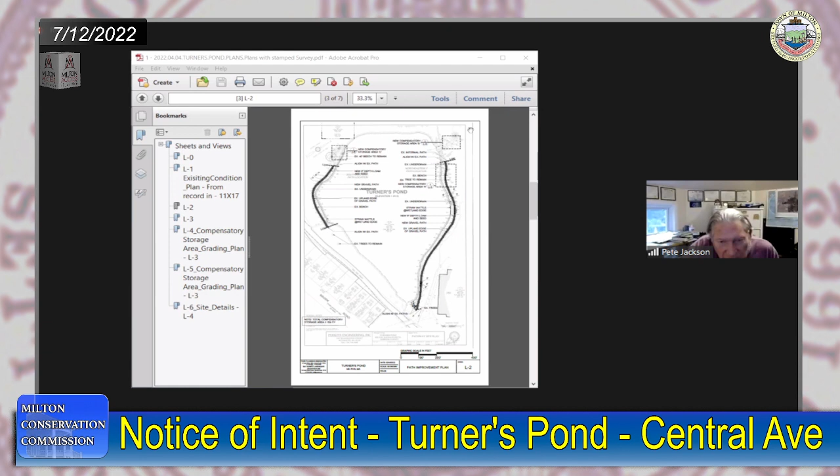Thank you, Steve, I guess you put that up. Yes, and those areas are along the north side of the pond. Up at the top would be Central Avenue and the Central Avenue parking lot. The lower right is the Glover School.

And the project on both sections will in essence raise the elevation of the path approximately 6 inches. It'll vary a little bit, and the calculation of everything is based on 6 inches, but because some areas have settled more and some less, it'll average 6 inches over the course of the pathway reconstruction. The north end, the longer end, is about 1,000 feet of path, and on the south side is smaller, starting right near the inlet that comes in from Pine Tree Brook.

Oh, now we're good, sorry. There we go, yeah, that's the path reconstruction. It starts on the other side, Steve, where the inlet from Pine Tree Brook comes in, and goes about 540 feet till just shy of the large beech tree that everybody likes along the pond there.

And none of it is in the BVW. There is some riverfront impact, and we've quantified that. There is filling with the new path material, which is very similar to what's down in the path now, combined with loaming and seeding the edges of the path.

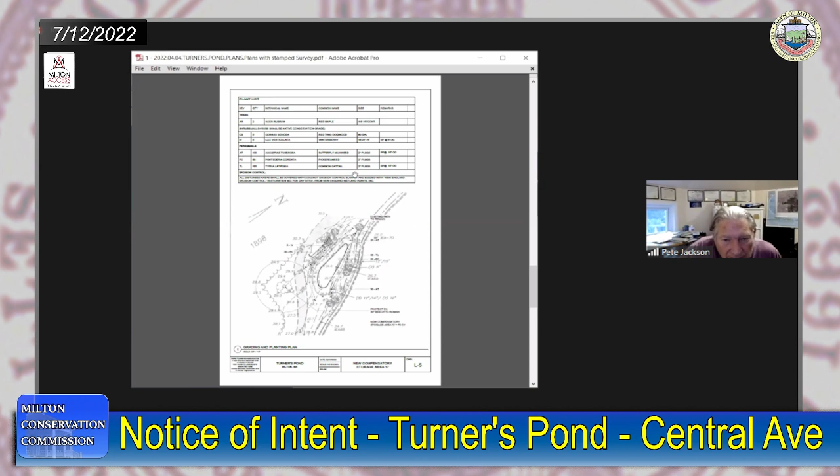Let's go down below to the path section, Steve, just so we can show what people are doing. So this is the path section where in essence we're increasing the elevation 6 inches and then side filling with loam and seed on the edges. The other details show the erosion control that we are putting along the entire length of the construction, between the path construction itself and the pond, just inboard of the wetland area, so even the erosion control won't have any impact on the wetland area.

Can you tell us about the composition of the fill?

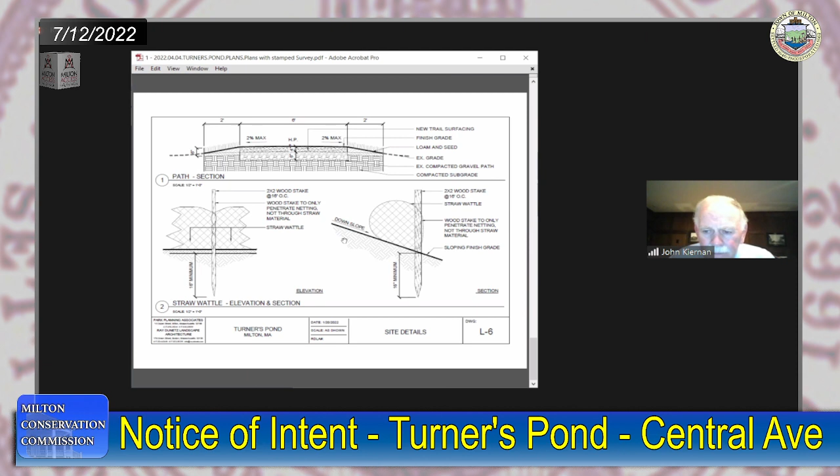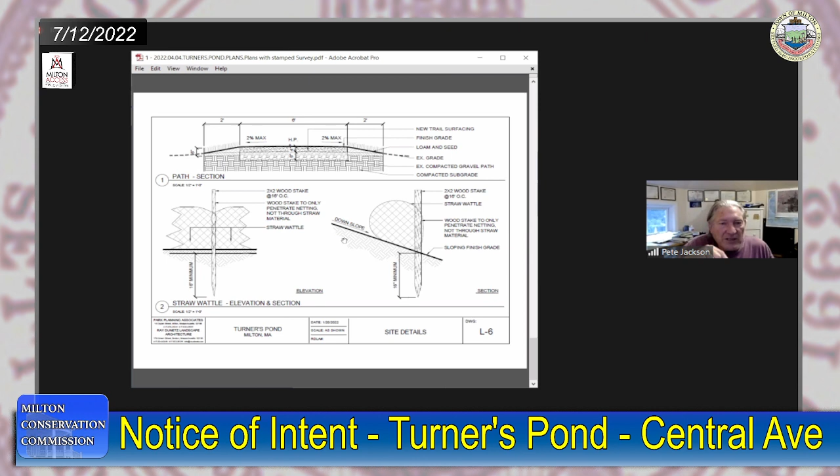It's 1/2 inch minus gravel fill, the same material used when the path was constructed. Actually, the last time it was constructed, two different materials were used. On the north side, the longer section, it was constructed with this 1/2 inch minus gravel. From the eastern side of the pond, where the current project ends, around the rest of the path was constructed with a stabilized soil material last time. That held up quite well for the most part, but we're using the same gravel aggregate material for the reconstruction of that site also.

This is Ingrid, I've got a question also. So John, good question, kind of along the lines of what I was thinking. I regularly run around Turner's Pond, and the northern section is a different animal. Whatever was done last time, the northern section deteriorated within a matter of a couple of years, while the rest held up pretty well. My question was, what are you going to do differently to address that problem? But it sounds like the answer to your last question was we're going to do the same thing. So I'm wondering if the strategy on the northern, and especially the northwestern section, which is the worst of it, merits some rethinking.

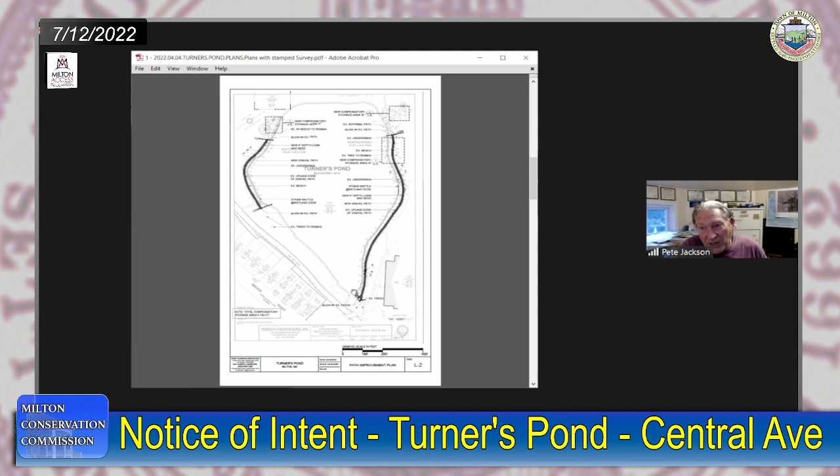When we specify the material, it's not a single size, like 1/2 inch or 1/4 inch. It's a blend with finer and coarser grains. The coarser grain allows percolation through, and the finer grains, when compacted very strongly, bind it together to make it more stable. So we put a blend of aggregates together that can compact and be stable and allow wheelchair accessibility - a combination of the material used and how it's compacted during construction. But the entire pathway will be accessible as it was last time.

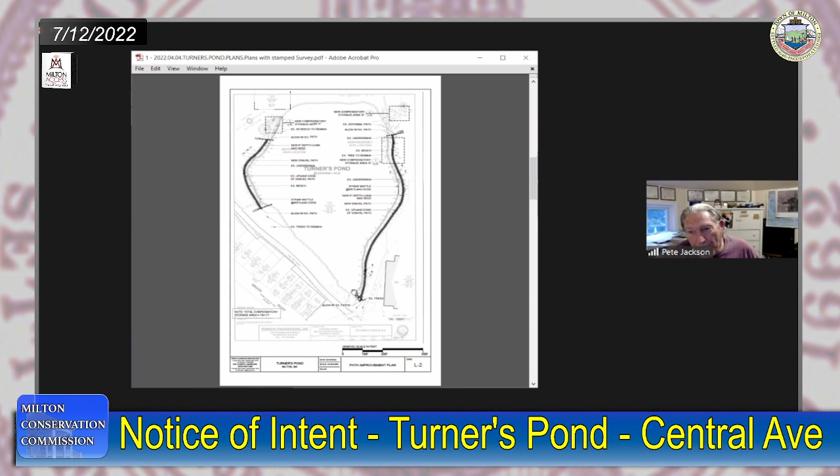It's probably appropriate at this time to honor the memory of Charlie Gamer, whose enthusiastic support a dozen years ago led to this, and along with you, Pete - the two of you were the champions of this project back in 2009 and 2010. So I salute you for that, and I salute Charlie Gamer as well, and I honor his memory. Yeah, terrific guy.

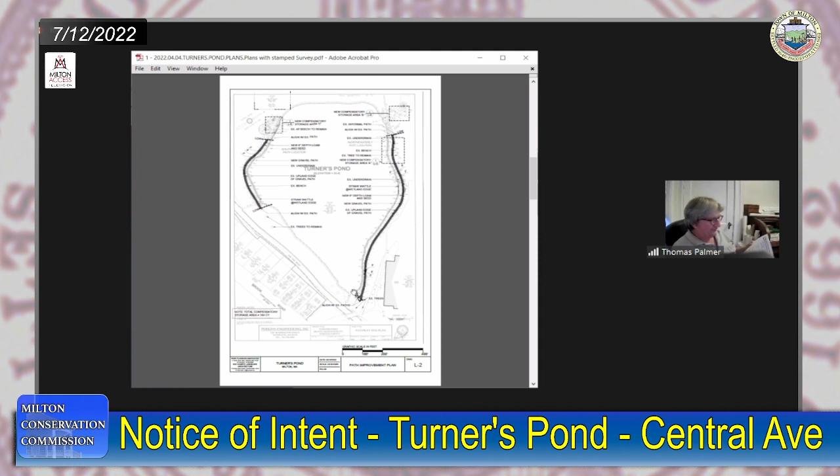Questions from commissioners? Yeah, I have a couple of comments. Can you hear me? Yes, sir. Steve, in your cover letter, you say the project is being permitted as a limited project? That's correct. Yeah, and if you go to the notice of intent, Form 3, look at 7B: is any portion of the proposed activity eligible to be treated as a limited project? And no is selected. Oh, that's a typo. All right. Thank you for noticing.

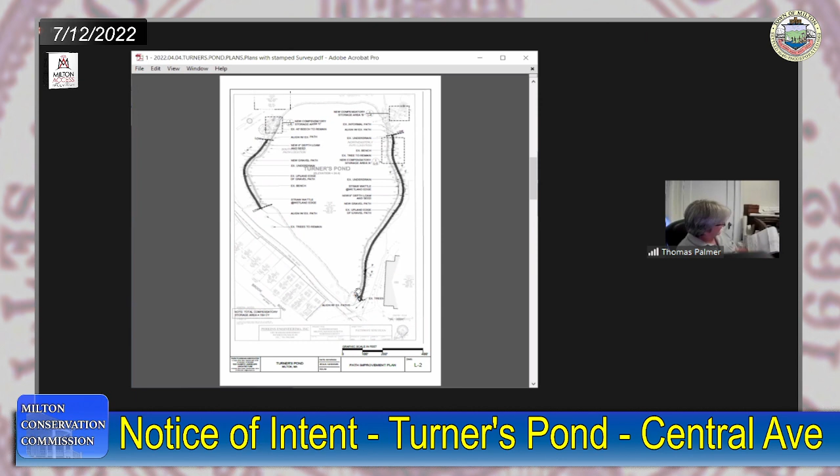One other thing, on the plantings - I'm looking at the plan entitled L3, new compensatory storage area K. If you look at that wide place in the area being excavated, the one at the bottom, you can see there's initials marking the types of plants. Beside 10 it says TL, and beside 20 it says AT. Can you see that? Those initials seem to indicate where those plants will be placed. That's right, and I noticed those plants don't seem compatible, because TL is Typha latifolia, which is cattail, and AT is Asclepias tuberosa, which is butterfly weed. Now, one always grows in water, and the other likes dry, sterile, sandy uplands. So they don't seem likely to grow well in the same place.

I'm just wondering how wet is that basin going to be, because it's got to be really wet if you want cattail, and it should never be wet if you want butterfly weed. Tom, there is a milkweed that's obligate or facultative wet - that's incarnata. Exactly, so that may just be the wrong species - swamp milkweed. I would say if it was swamp milkweed, then they'd probably be okay together. Yes, the swamp milkweed is the one that's good for the caterpillars - the other ones they don't like. So maybe the plan should be, wherever you see tuberosa, cross out and write incarnata.

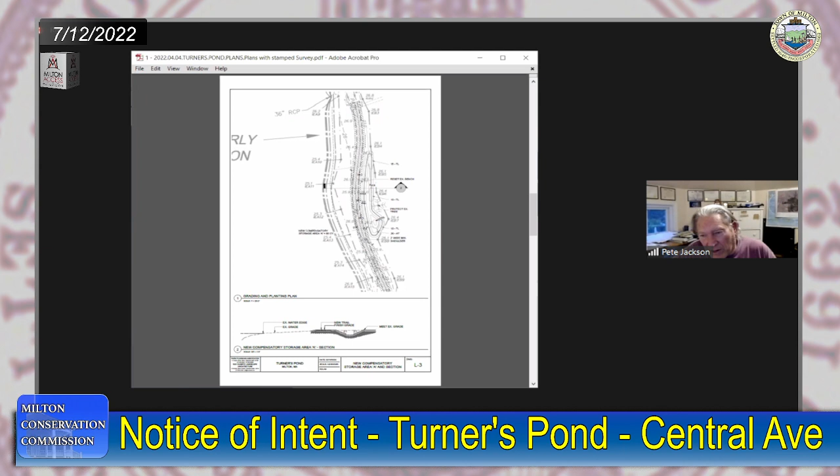All right, we can certainly take a vote on this contingent upon the submission of a revised plan, indicating what you just spoke of, if that's acceptable to the commission members.

In the absence of any other comments or questions, is there a motion to issue an order of conditions contingent upon a revised plan to address Ingrid's point, Tom's point, and Arthur's point?

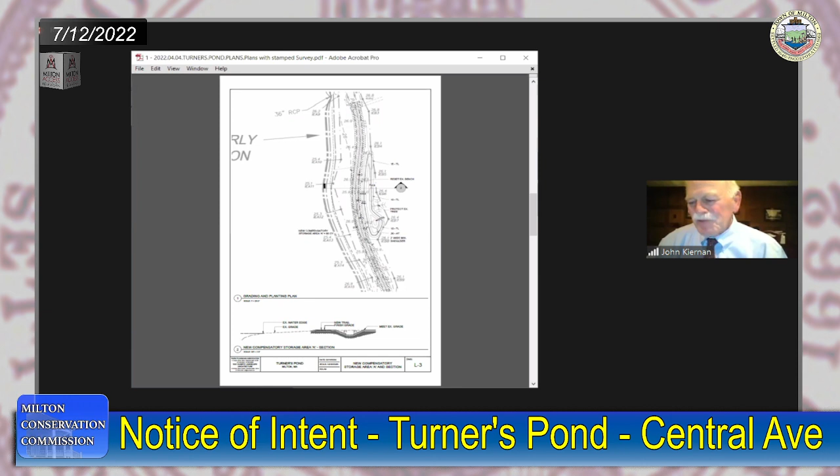Thank you. All right, thanks Pete very much for your work on this. This is a great project.

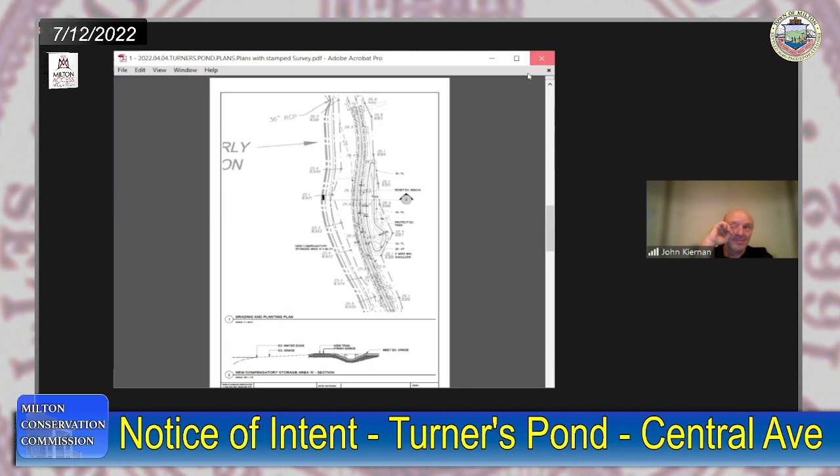All right, next on the agenda, we go to number 2. This is a request for determination of applicability at 65 Ruggles Lane. Ingrid, you want to speak?

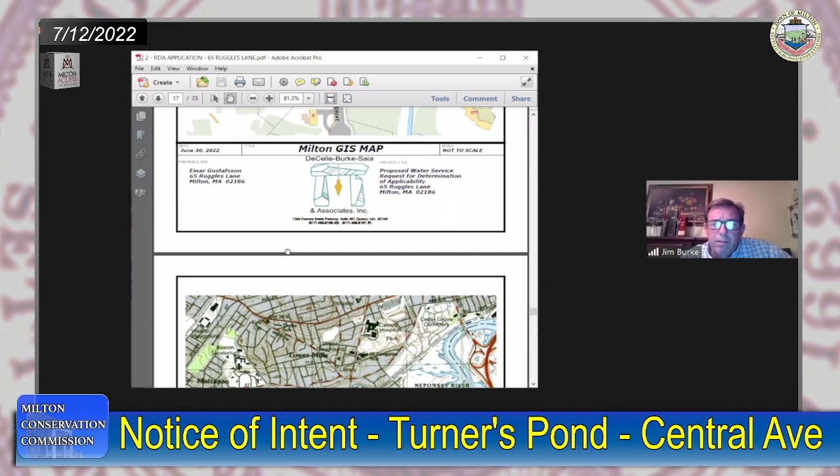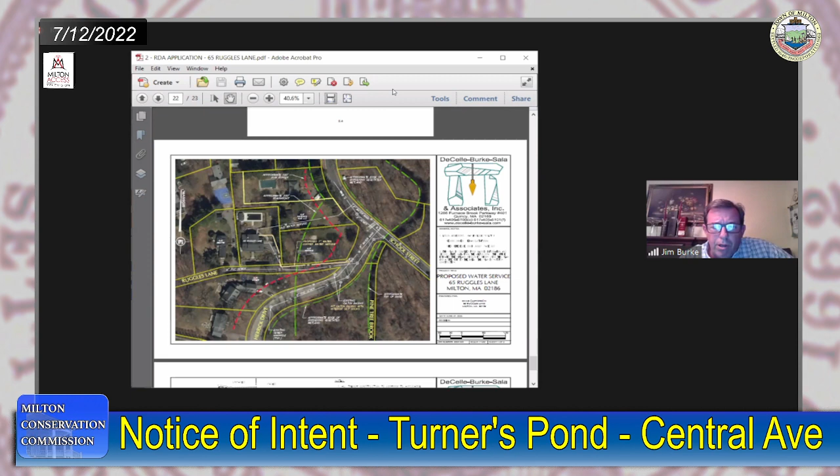I think this is kind of a real simple project. We are proposing a new water service for 65 Ruggles Lane. It happens to be within the 200-foot riparian zone for Pine Tree Brook. We'll be tapping the main at the intersection of Ruggles and Herrick. There's an existing 8-inch water main within the Herrick Drive layout, and the proposed service would run within the Ruggles Lane layout.

Given the fact that there's going to be absolutely no vegetation clearing and no changing of grades or anything like that, I thought the request for determination of applicability was appropriate, despite the fact that it's within the riverfront area. The town crew will be doing the work. They're capable of putting this pipe in the ground in a couple of days, doing the work quickly. You're going to be repairing the surface in kind. Paved surfaces will be paved surfaces. The gravel drive on Ruggles will be gravel again. Erosion control will be used if needed, but I expect them to be excavating, putting the pipe in place, and backfilling as they go.

They're going to be coordinating with the neighbors, given the fact that there'll be a little bit of disturbance, especially with Mr. Hinkle and his lot, where it would be coming across his driveway. I talked to him and he's familiar with the town crew and the like and all the players. Mr. Gustafsson, the owner of 65 Ruggles, is here in the audience. I'm not too sure if he wants to say anything, but that's pretty much what the project is. Pretty simple water service, happens to be within a 200-foot riparian zone.

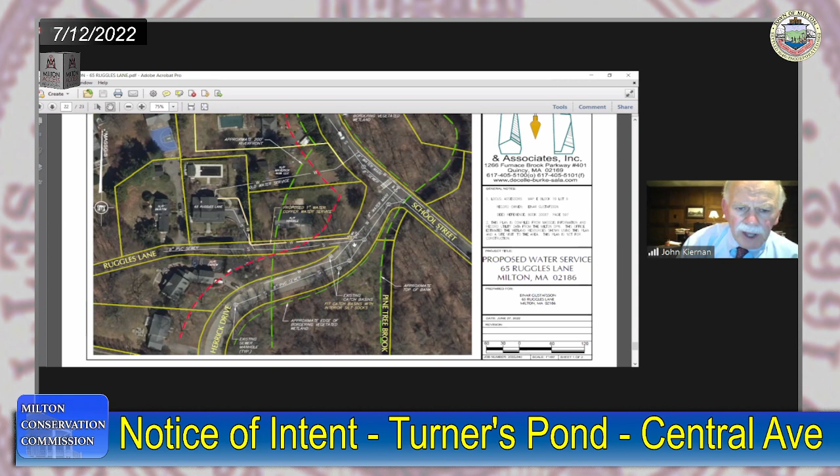This is a request for determination of applicability, and it may be, if the commission is so inclined, appropriate to issue a negative determination with certain conditions. One, that the equipment can't be stored overnight or refueled within our jurisdictional reach. And the safety component of open trenching would have to be complied with so that no trenches are left open overnight. It would be contingent upon the approval of the DPW. And I would suggest, since you were using an engineering term of 'out there,' that this is more of a cartoon than an engineering plan, but we would like a copy for our file of the actual plan that you submit to DPW for approval.

Certainly, and with those conditions and any others, I'd invite any other comments or conditions to go along with a negative determination from commission members. Steve, anything else that you could think of? I don't believe so, this is a pretty cut and dried project. Yeah, it's very simple.

Good, all right, well with those contingencies, is there a motion to issue a negative determination? I move that we issue a negative determination. Thanks, Tom, is there a second? Aye. Thank you, Todd. Any further discussion? Hearing none.

Todd, how do you vote? Yes. Tom Palmer, how do you vote? Aye. Arthur Doyle, how do you vote? Ingrid Beatty, how do you vote? Ingrid, recuse yourself, she recused herself. Apologies. Wendy, how do you vote? Yes. And I vote yes. John Kiernan votes yes as well.

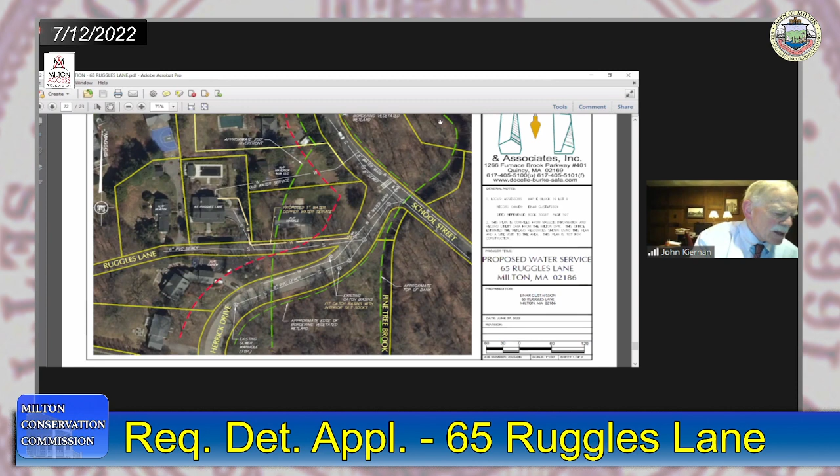All right, I just texted Ingrid. Hopefully she'll get the text and return. Stalling a little bit, and if anybody can see Ingrid before I do, will you just alert me?

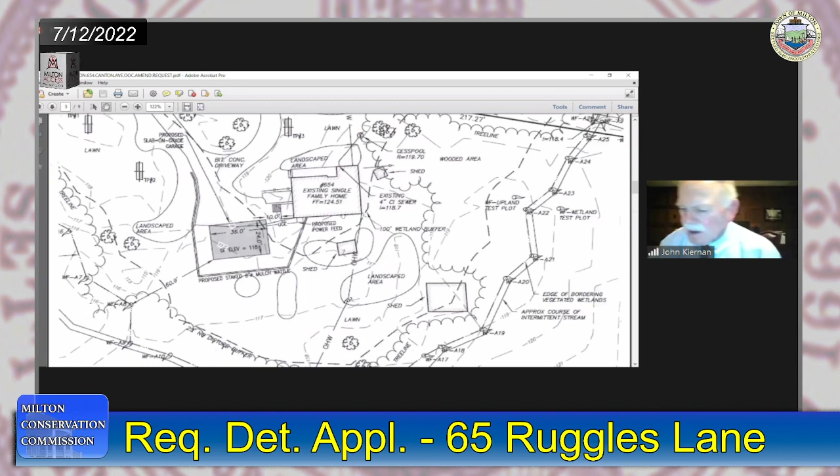While we're waiting, for the public's benefit, we're on agenda item number 3, amendment of order of conditions, 654 Canton Avenue. But before the applicant begins... I can call her, is she back? Yeah, I'm here. Oh, great, perfect, thanks Ingrid for coming back. Ingrid, just for your benefit and the public's knowledge, that was a negative determination with conditions: DPW approval, engineering plan submitted to us, and our usual prohibition of overnight storage or refueling on site within our jurisdiction. So we're all set to go on number 3, 654 Canton Avenue.

Good evening. Hi, good evening. I'm Kristen Repa, 654 Canton Ave. Thank you very much for hearing us this evening. Shall I tell you a little bit about what we're looking to do? Yes, please, thank you.

I know that Steve scrolled along a letter that I submitted. Basically, this is an amendment to the order of conditions that we were granted at the end of 2020 for a garage to be built. That's what we're looking at now on the screen. The location of the garage is, that's the approved plans. The amendment is that we would like to... we have not started anything at all. We would like to move the garage up towards the driveway. So that would be, I guess, I'm not actually seeing a key here to say north, but up.

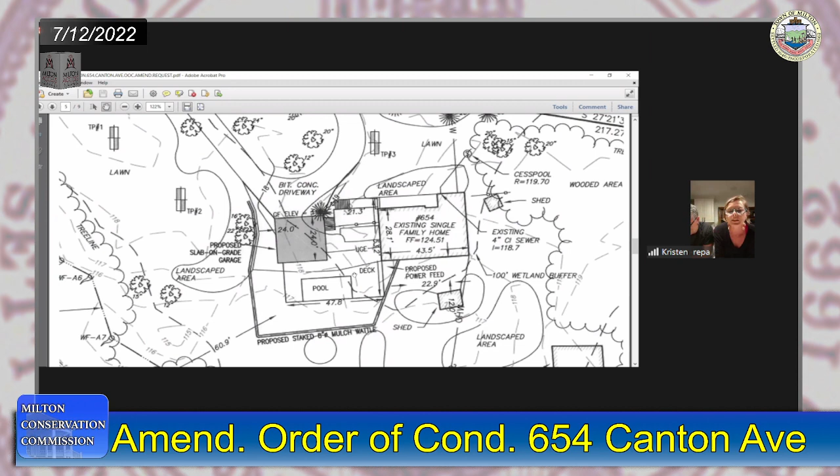an above ground pool there. So we are opting for, or we would like to consider, an above ground pool, as we feel it's least invasive. So what we're looking at now is a version—I've given 2 copies for the board to consider: a version with a slightly smaller garage, a 24 by 24 foot garage.

The original approved garage size was 24 by 36. So what we're looking at right now is the approved size garage moved up to the location we just talked about, but the old location of the pool, which you can see behind the blue, the gray square, would be what we're asking approval for—an above ground pool. We would then do wood decking or composite decking to surround the pool, and we feel this would be the least impact to the property and surrounding area.

Do you know what the increase is in impervious surface? We already knew about the garage because it was approved, but you've got a breezeway, and then you've got the pool, and a patio or deck surrounding the pool. The breezeway is pretty much a deck—we weren't looking for it to be built in with a foundation. It's basically a porch area. So in regards to increased impervious surface, I guess that would just be the pool area.

I apologize for saying it with a question in my voice, but the size of the pool we have drawn in on those plans is 12 by 24.

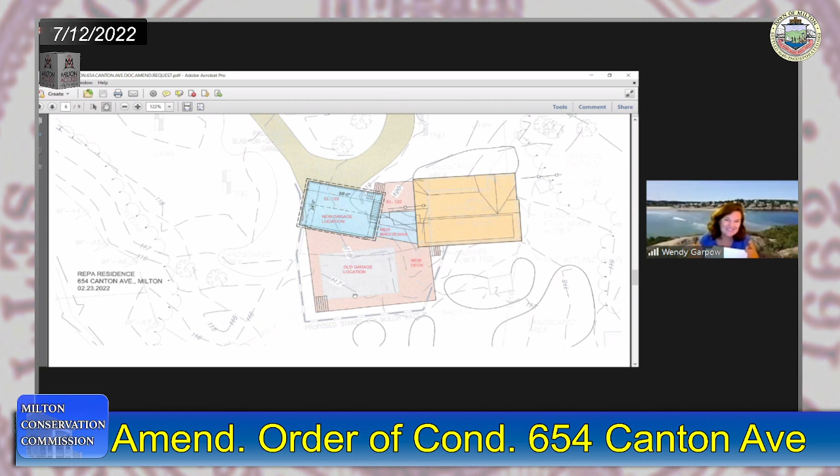All right, then without questions or comments from the members of the public, and no further questions from the commission, is there a motion to make a determination that this is a minor revision?

So moved. Thanks, Tom. Is there a second? Second. Thanks, Todd. Any discussion?

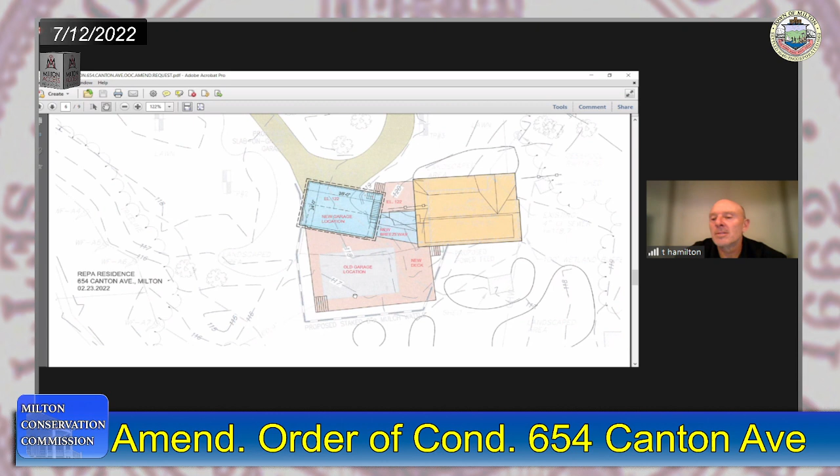All in favor? And this is just the first vote, that this would be a minor revision. Tom, how do you vote? Aye. Todd? Yes. Wendy? Yes. Ingrid? Aye. Arthur? Yes. And yes for John Kiernan. So that's unanimous. It's minor.

So is there now a motion to approve this revision and thereby revise the order of conditions that was previously issued? So moved. Second? Aye.

Thanks, Todd. Any discussion? I will make a comment that the conditions of the original order of conditions would still be in place. Certainly, of course.

Okay, so with that comment, how do you vote, Tom? Aye. Todd? Yes. Wendy? Yes. Ingrid? Aye. Arthur? Yes. And yes for John Kiernan as well. Unanimous vote. You've got a revised order of conditions.

Thank you very much. I appreciate all of your help this evening. Thank you. Oh, great. Thank you.

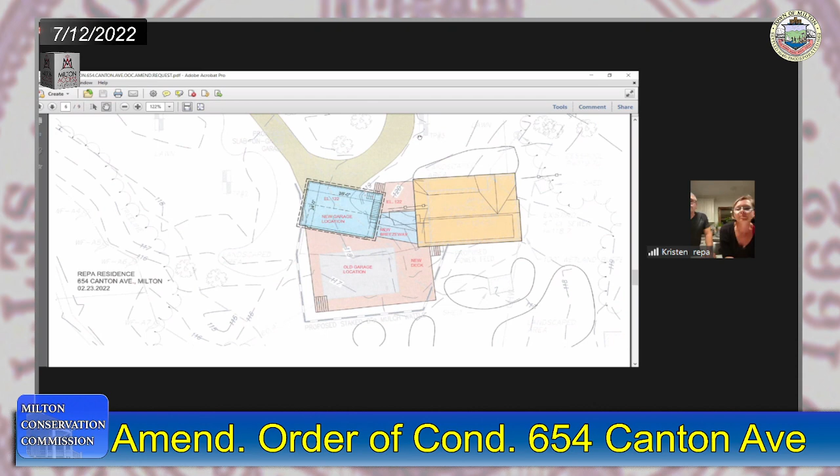Which takes us now to amendment of order of conditions, 1672 through 1726 Canton Avenue, Wolcott Woods.

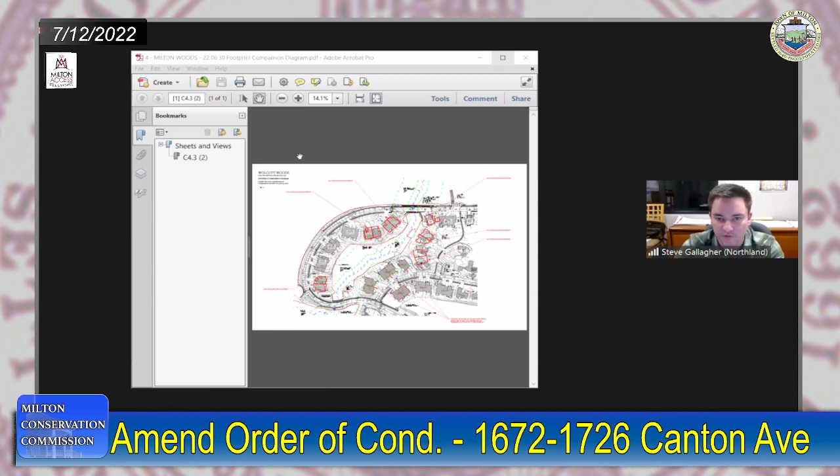All right, should I start? Yes, sir. Okay, great. So hello, everyone. Steve Gallagher, Development Manager for Northland Residential. And as you said, I'm here regarding the Wolcott Woods project on Canton Ave in Milton, a project that I know most of you are very familiar with. Just a quick update on where we are.

We've basically completed the first phase of the site work, and we've basically completed the unit construction all along Wolcott Woods Lane for the first phase. We're now extending the road work, the site infrastructure for the second phase, which, if you think of the site like a clock, is essentially wrapping around in a counterclockwise direction up to the top of the site. So we're in the process of building that stage of the road right now, and we'll continue on building units.

We're here because we've made a couple of changes in the past several years, which are now approved by the planning board, and we're here to kind of complete the process with the Conservation Commission. So this is not a new change that we're presenting to the town. It's something that has already been discussed in the planning board venue at least. There's really two components to that.

One is that in 2020, we changed the architecture. So we had essentially kept the site plan in place but changed the aesthetics of the buildings, and that entailed certain changes to the footprints, where they bump in and out a little bit differently than the other buildings did, but essentially not much in the way of dramatic changes to the footprints. That being said, certain of those footprints are at least partially within the 100-foot buffer, so it is within Concom jurisdiction.

For the first three of those, buildings 5, 6, and 7, we came back later that year in 2020 and received Concom approval to make those footprint changes. Those are right in the center of the screen you're looking at, buildings 5, 6, and 7.

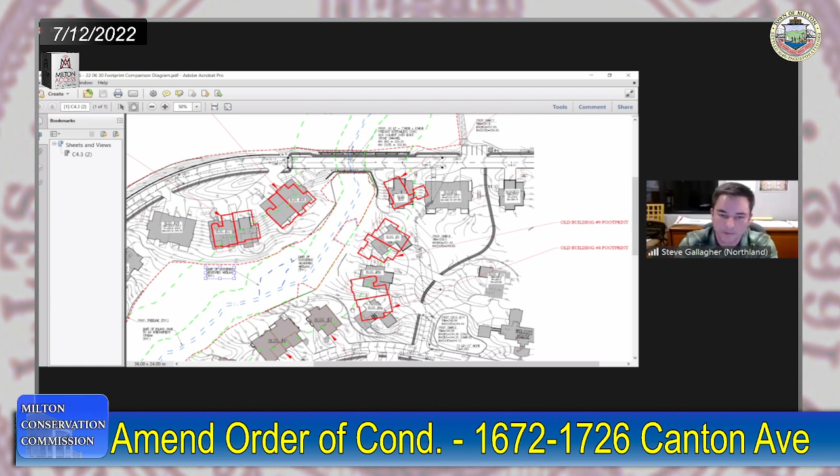One of them, building 8A, is actually totally outside the 100-foot buffer, so it's really only 2 buildings, 2 singles now, partially within the buffer - that's 8B and 9. The green dashed line is the 100-foot buffer. You can see they're not entirely within it, but they're partially within it.

Can you put your cursor on that line you were referring to? Sure, right here for example. See the dashes, the green dashes, John. Maybe I'm colorblind - there is a green colorblind thing. I haven't had it yet, so maybe I just got it. All right, I see the line you're referring to. Thank you.

Steve, I think you may have had a conversation with Deb Keller, who's not on the call tonight but is the engineer of record who, in accompaniment with this sketch, presented new stamped drawings describing the change. Yes, I did have a nice conversation with Deb, and she explained it to me as well, so I understand it as well as I can. I'd be happy to answer any questions about it too.

I have a question. I'm looking at building 25 - we were just talking about it on the right side, the one on top. The red outline is the old alignment, yes. And next to it, it seems to interfere with building 24. Is building 24 also the old alignment?

What you're looking at underneath in the gray is the new alignment now approved by the planning board - that's building 25. They're both perpendicular to the road just above, so they're not conflicting. We did make additional changes to the footprints of those too, since all the buildings have new architecture, so the footprints have shifted a bit. But I just showed in this sketch the ones within Concom jurisdiction, at least partially within the 100-foot buffer. So the gray ones are what will be there.

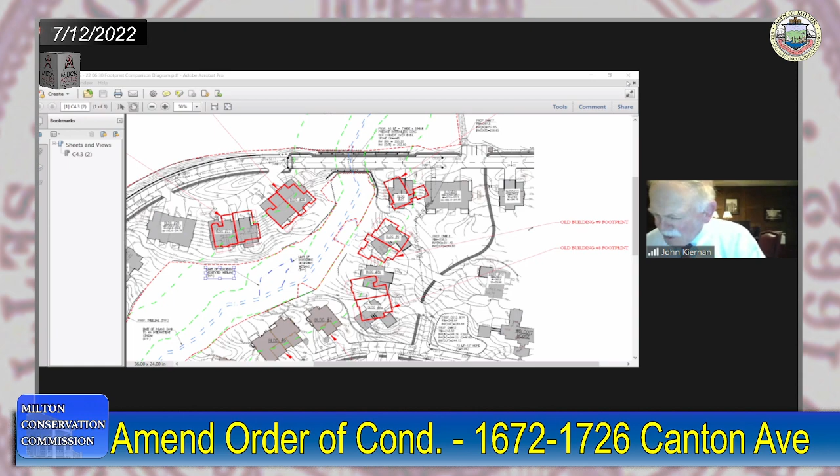Next on the agenda is number 5, a request for certificate of compliance at 328 Adams Street. Do we have the applicant? Mr. George, do you? Yes, Mr. Chair, Ned Corcoran, here on behalf of Michael and Cynthia George, owners of the property at 328 Adams Street. I'm also joined by David Charlakin and Steve Garvin from Samiotes Consultants, the engineer of record, and Tom Lee, who prepared planting plans previously for the commission.

This is a large property owned by the Georges. They are selling, and we have a closing this month. Title revealed we had not secured a certificate of compliance for work previously approved in 2014 within the 100-foot buffer. You may recall, Mr. Chair, that this property abuts the Forbes Woods, and a portion of the property, a large lawn, is surrounded by an old stone wall. Mr. George restored that wall, and I believe work may have started within the 100-foot buffer before approvals were secured. I remember at least one or two site walks with the commission back in 2014 regarding that. In any event, the wall has been substantially completed in accordance with the approved plan.

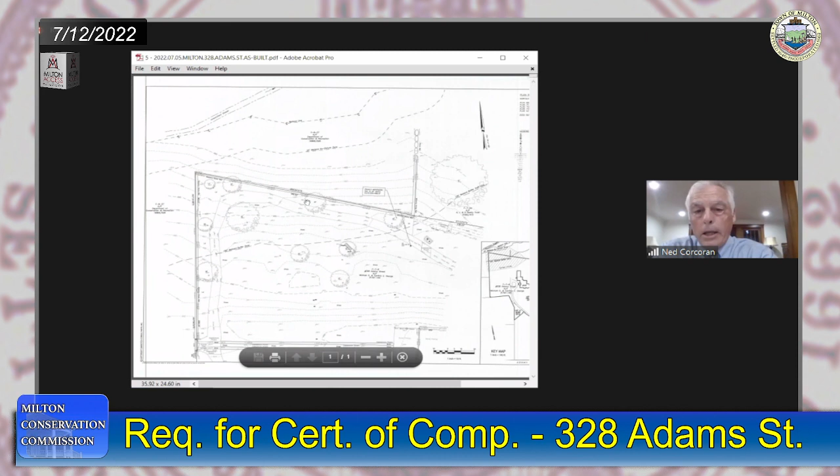There was a planting plan created by Tom Lee that called for installation of some understory trees and other plantings, particularly between the walking path and the wall. At the end of the day, given cost and other things, the Georges decided not to install those plantings. Instead, they simply planted grass lawn with other ground cover between the wall and the walking path, so they did not install the understory trees originally proposed and approved by the commission as part of its order of conditions.

I think there were 5 understory trees that would have grown to a height of about 20 feet. Steve and I walked the property yesterday with David Charlakin from Samiotes. I showed him a photograph attached to a letter that was submitted, actually submitted late today. I apologize, I was out of pocket most of the day, and Tom Lee submitted a letter to me this morning that I forwarded to Steve earlier this evening. But there's a photograph that just shows lawn and none of those trees.

I've been authorized by Steve, and we talked about the fact that if this were a situation where trees were removed, either in error or otherwise, the commission would request a replacement of trees or perhaps a payment into the fund to provide replacement of trees elsewhere. I understand the value of that replacement is generally $500 per tree. I've been authorized by Mr. George to offer $500 per tree to cover the cost of the 5 trees that were never planted, that would have been planted within the commission's jurisdictional area.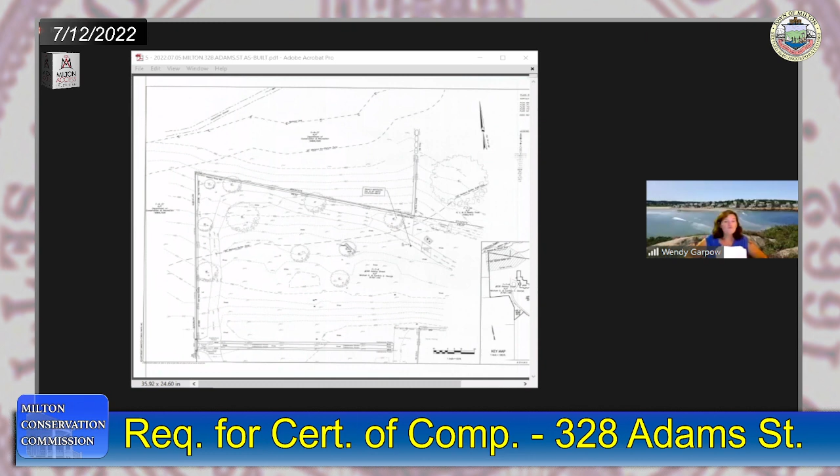All right, that was not part of the order of conditions, correct? I think it was part of the plan showing. I don't know, let's see, I can get the plan up. I think I have it here, this plan right here. There's one plan, do you see that? Another plan I just put up that has some pink and green on it. No, we don't see that, it hasn't changed, Steve.

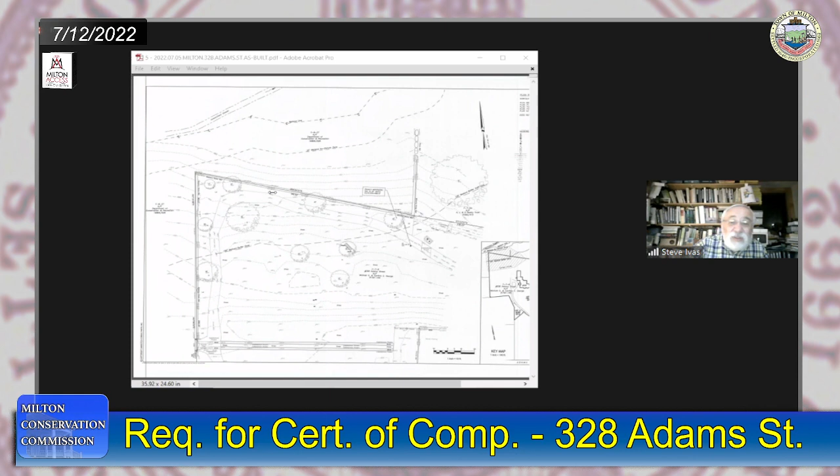Okay, sorry, I will new share. There we go, there's one plan, you see it now? I see the plan, but I'm not oriented as to where the wall is. The wall is at the top where the cursor is. Yes, if north is up, it's on the northwest corner. There's no path on that one.

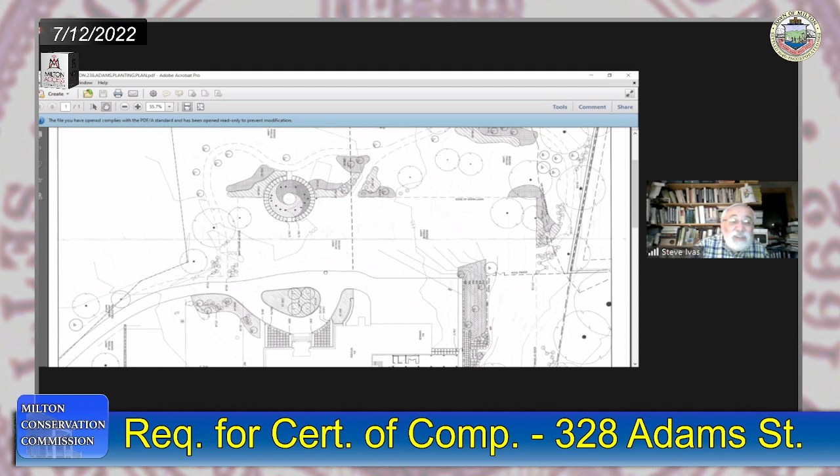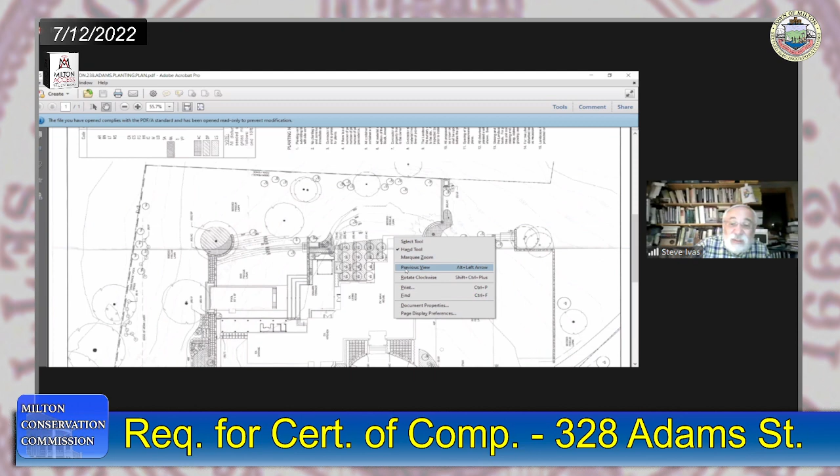And there's another plan as well. Hang on, let's see, I think that's this one. There we go, let's get new share. So it's that plan, I think. Bring it out here. And there's the path, let me see. Sorry, different orientation, hang on a sec. You need to rotate it 90 degrees counterclockwise. Right, how do we do that? Right click on the drawing, yeah, rotate, you have to rotate it 3 times. Thank you, Tom. It's annoying. There we go, and so there's a pathway right here.

Is this the house that used to be Beatrice Forbes's? No, a different one. She's out closer to Marcrest Drive. Okay, my mistake.

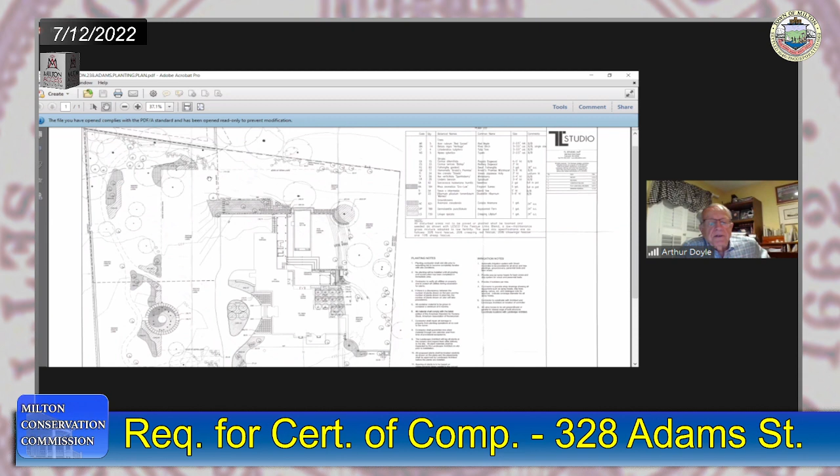Can you scroll up a little bit, Steve, please? Sure, like that? Yes, thank you. The house is actually here. This is the right house. Okay, there's a pool here, and there's a grove of old cedars here, and a driveway. Do I remember that the path intersected at some point with the driveway, not far from the front of the house, or am I wrong?

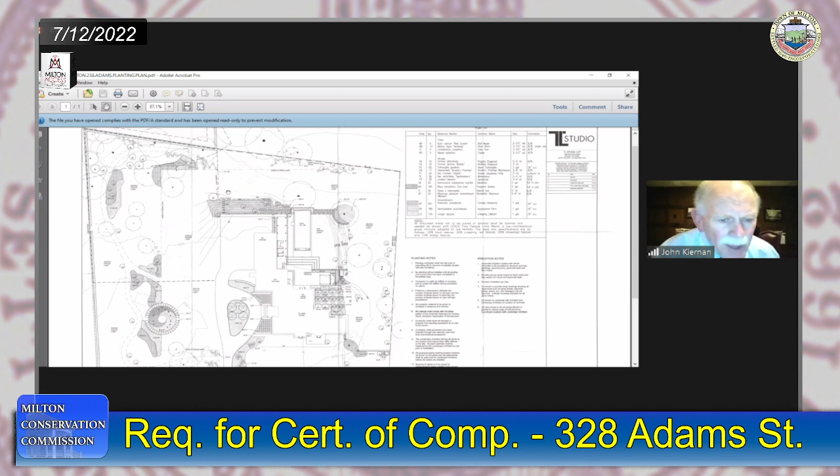There's a fairly large gravel parking area right where Steve's cursor is. Yep, and then down below that it does intersect with a gravel path. Okay, I thought I remembered that. I don't recall a path up by the wall. I thought it ran parallel to the wall, John.

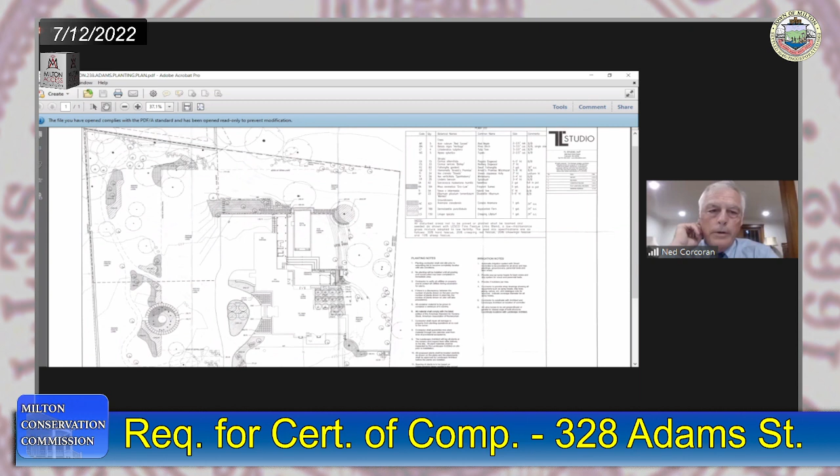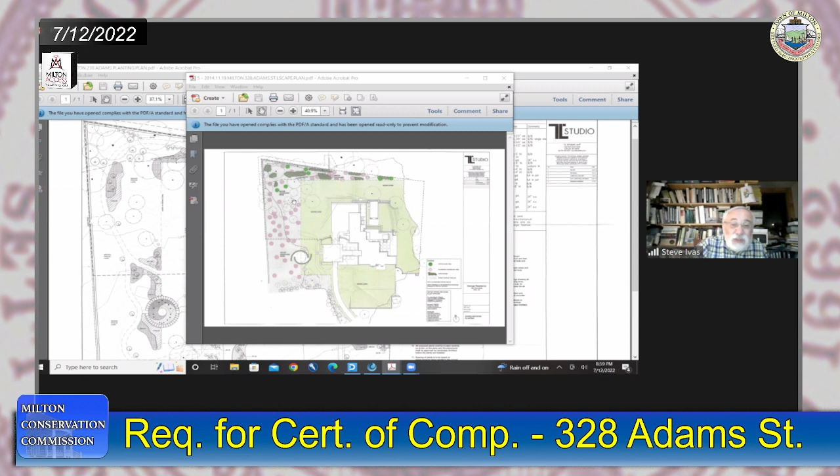And where were the trees going to be planted? If you go to the other plan, Steve, there was a planting plan that showed... Can you see that? Yes. Okay, so there's some dotted pinks and dotted greens there. Those are trees and shrubs. If I zoom in, that was my memory. So that's why I don't remember the pathway, because that's where I thought the trees were going.

At the end of the day, the Georges did not pursue this more complicated planting plan. They simply planted grass, preserved existing trees, but just planted basically lawn and some other low ground cover.

Understood. Any questions from commissioners, comments, concerns? No, I didn't say anything. All right, members of the public that have a question or a comment?

So the issue is whether or not we should issue a certificate of compliance based upon substantial compliance, with the deviation being the 5 trees that were not planted. The applicant has offered $2,500 in lieu of those 5 trees. Is there a motion to accept that offer of $2,500 and to issue a certificate of compliance?

I'll move accordingly, Mr. Chairman. All right, Mr. Doyle, second? Second. Thank you, Todd. Any discussion?

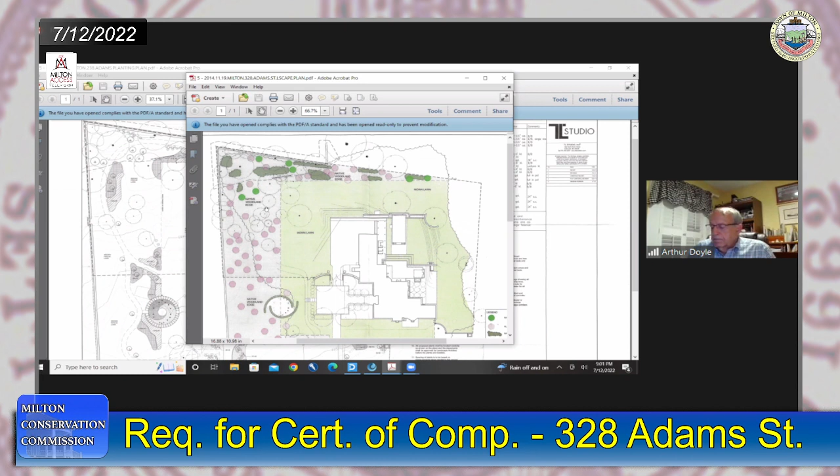Tom Palmer, how do you vote? Yes. Arthur Doyle? Yes. Todd Hamilton? Yes. Wendy Garpo? Yes. Ingrid Beatty? Aye. And John Kiernan, aye as well, unanimous. So the order of conditions, the certificate of compliance is issued.

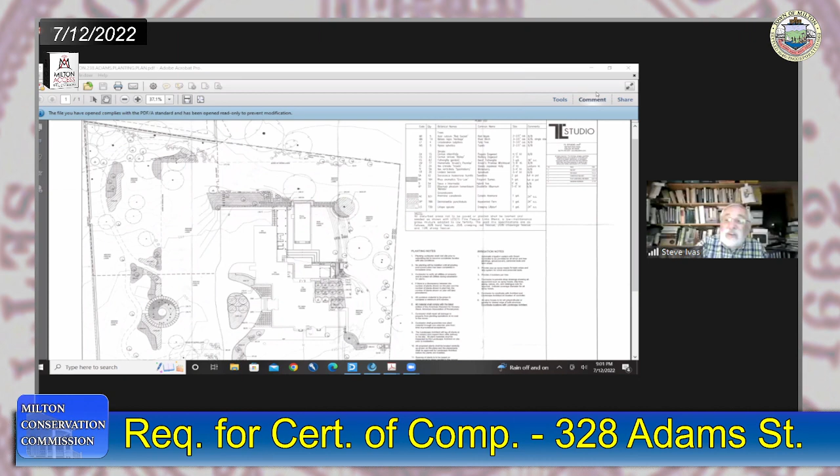Thank you very much, Ned. Appreciate it. That's terrific. Thank you. All right. And that was... thanks, Ned. Yeah, that was item 5. So 6, 7, 8, 9, 10, 11, and 12 have been continued.

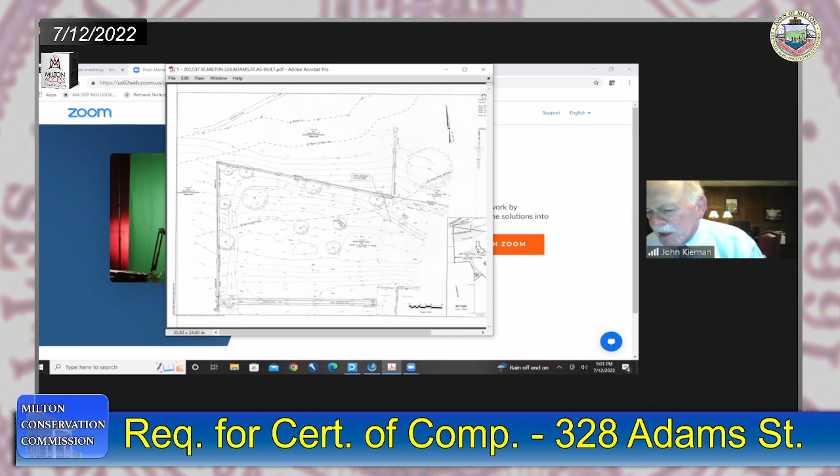So we now go to item 13, information regarding a proposed playground, Peverly Park, near Pope's Pond Park. That's me, Jackie Golden.

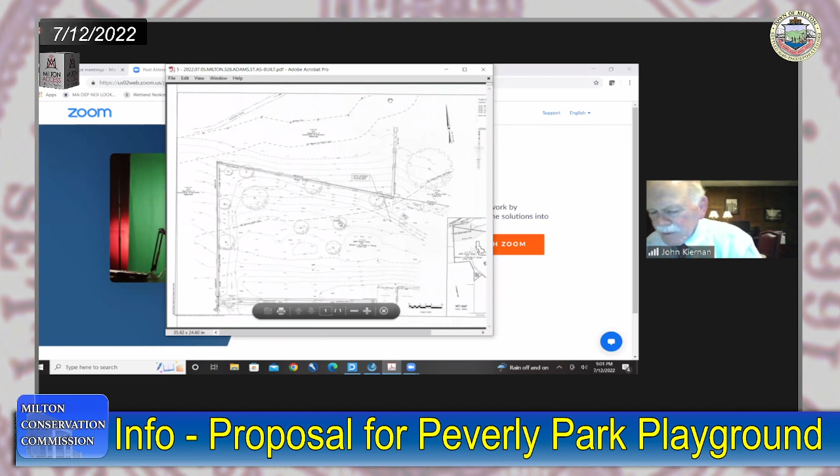I have some materials. I don't know if they're going to be pulled up, or if you want me to share them. If you would like to, yes, please. Perfect. All right, we've got to just get you to share, right? Yes, okay.

Jackie, right? Yes. And let's see, how to... I'm not sure how to do that. Sean, are you available? Sean Doyle? We're helpless without it. Yes, sorry. Tom, do you know how to do it? To share? I think it's either share my screen, Steve, but Sean, I don't know who else's I can share. Right, Steve has the capacity, but Mike is sort of the master of ceremonies. I'm sorry, Sean is, yes. I can find Jackie, and I don't know how to elevate her to share a screen. Anybody else understand that process?